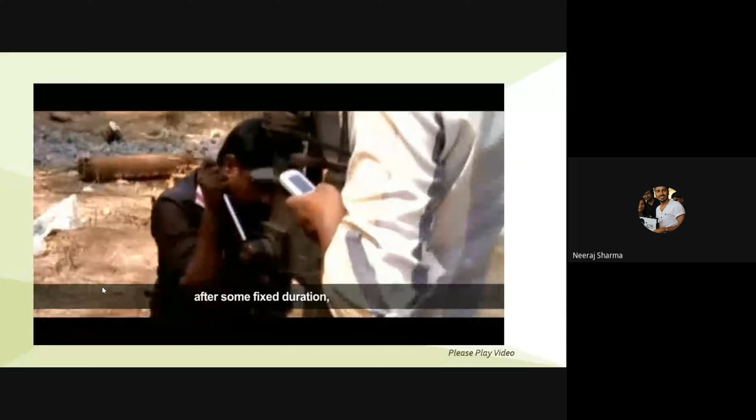So the basic agenda is pretty straightforward, and that's what it is: the free electricity that is being given to farmers is either at free rates or at very low rates. So the cost that the farmers are paying is really negligible.

So on the subsidized rate at which electricity is being given, the agenda is to further invest in the agriculture sector, either through solar pumps or energy efficient pumps, so that this subsidized electricity cost could be reduced. For example, the government has paid 8,000 crores for farmers in Punjab. So next year, by switching these pumps to solar pumps, they may have to pay somewhat around 7,500 crores. That's what the agenda is.

Reduce their overall cost through these agriculture demand side management initiatives. Now, different states have taken different initiatives under the agriculture demand side management program.

For example, Haryana has mandated the use of efficient pump sets. Now, how are they mandating it? For any new connection for pumps - if I am a farmer and I have my land somewhere nearby, let's say Ropar or Patiala, if I have to use a pump, I have to apply for an electricity connection. Whenever I apply for an electricity connection for my pump set, the utility or discom will mandate me to have minimum 4-star energy pump or minimum 3-star pump, depending on the state laws and notification.

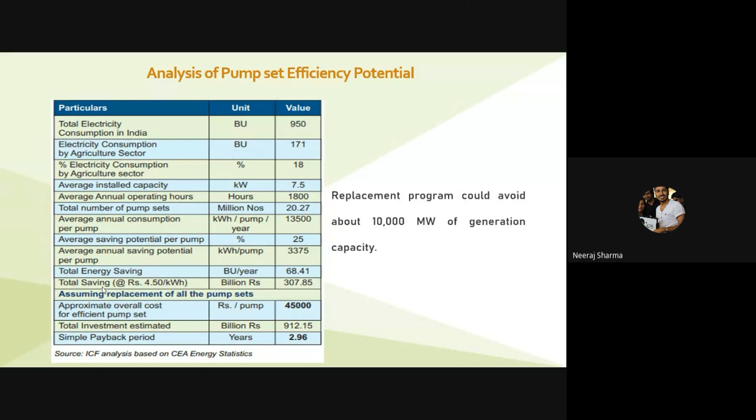We are not transitioning these pumps to solar pumps. We are just saying that by making these pumps energy efficient, the overall cost would be somewhere around 45,000 rupees per pump, and the total investment required would be 912.15 billion rupees. Within 3 years we may have a simple payback, and this may avoid somewhere around 10,000 megawatts of generation capacity.

There is one more thing which is very specific, and there are many claims for the same. Now you may say it's a democratic country and these things may happen or may not happen. Let's not talk about the political aspect of it, but let us talk about the policy aspect of the same.

Long back, when Punjab started free electricity, the average pump set that farmers were using was somewhere in the range of 5 HP, maximum 7.5 HP. This was the groundwater level at that time.

Unfortunately, there are many claims which say that due to the free electricity provided to the farmers, they are running more pumps now. They just turn the pump on and leave to their home, and when the electricity turns off, the pump goes off accordingly. They do not come back to the field to turn the pump off.

This is a specific statement by many newspapers, a direct claim, which says that when they provided free electricity, the average pump power was somewhere around 5 HP or 7.5 HP. Today, most farmers are using pumps with much higher power because they have consumed so much water that the groundwater level has been reduced. So they have to deepen their borewell, and in order to do that, they further have to increase the capacity of the pump.

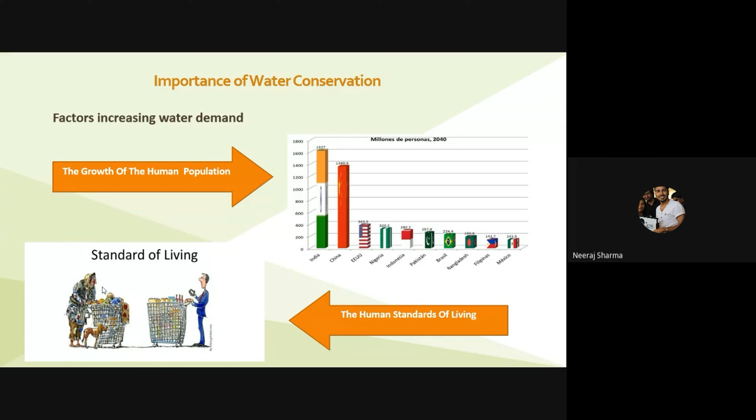But nowadays we are also using fixtures with higher flow, so that's not a good thing. So the government has come up with, in order to have water conservation, three basic options: reduce demand, reuse wastewater, and replenish groundwater.

So they have come up with the Jal Shakti mission, which has its own focus on conserving groundwater. Basically five water conservation interventions which they have gone for: intensive watershed development, renovation of traditional water bodies which they are renovating, reuse and recharging of borewell structures, water conservation and rainwater harvesting, and intensive afforestation. So these are few aspects on which the Jal Shakti mission is running.

Please do not confuse it with other running missions such as Namami Gange and the rest. They are trying to clean the water. This agenda is just to conserve the water. So there are some other running agencies and ministries as well, just to conserve the water and to clean the water. So they have different opinions as well as policies.

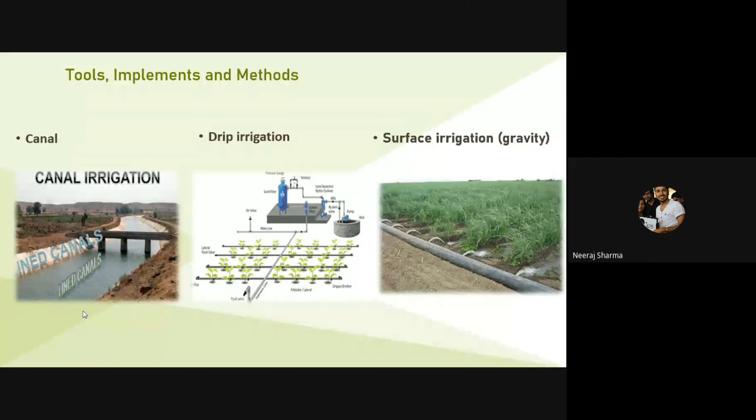The second is drip irrigation. Another is sprinkler irrigation, which we'll talk about. Then there's surface irrigation, which works through gravity, where a whole pipe runs through with holes or valves that open, so the water flows into the field through gravity.

Then there is furrow irrigation, which is conducted by creating small parallel channels along the field length in the direction of the slope. Within the slope they prepare channels, and the water spreads into the soil - a very efficient method of irrigation for crops.

Then there is center pivot irrigation, which is basically a kind of sprinkler irrigation. It has several segments of pipe joined together, supported by trusses, and it runs within a circle - it moves and rotates, just like the sprinklers you might have seen in the fields.

And finally, irrigation by lateral move. This usually doesn't happen in India, but in many countries they follow this. In India we already have land scarcity, and farmers don't want to go with these techniques, so they don't use this kind of irrigation. But this method has a series of pipes, and they run on wheels, with water sprinkled along its length. So these are a few methods of irrigation which farmers are already using.

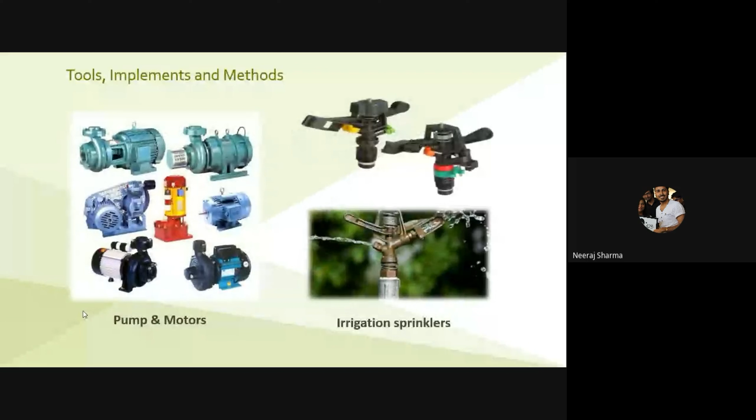Now apart from these, there are a few more tools that farmers use. One is the reservoir, and another is the dam. A reservoir is basically an artificial place where water is collected - we'll talk about it again ahead. It doesn't mean it's only for a whole community; sometimes even for a small field they prepare a reservoir. And the dam, we all know what a dam is - it's used to control the flow. Then there are pumps, motors, and irrigation sprinklers. These are the major tools to talk about. Let's see a small video, and then we'll move ahead.

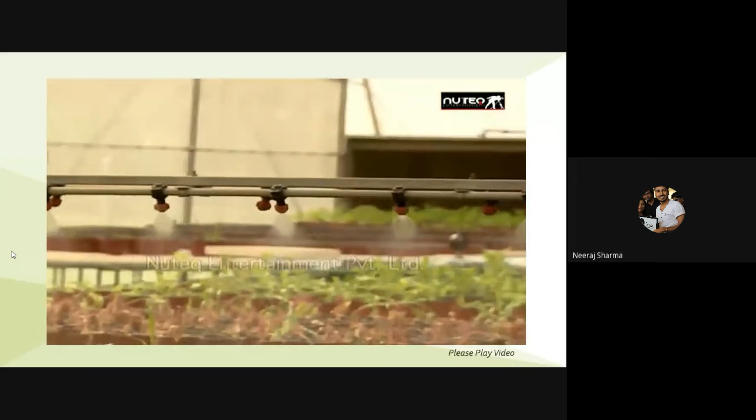किसान पारंपरिक सिंचाई विधि के बजाय उन्नत सिंचाई विधि जैसे ड्रिप सिंचाई, फव्वारा सिंचाई आदि अपनाकर पानी की काफी बचत कर सकते हैं। ड्रिपर द्वारा पानी बूंद बूंद से पौधों की जड़ों में दिया जाता है।

जहाँ पे बारिश कम होती है, जहाँ पे रेनफेड एरिया है, वहाँ हम कोशिश करते हैं कि वर्षा का पानी किसी तरह से रोक लिया जाए। टपक सिंचाई व्यवस्था हो चाहे फव्वारा सिंचाई व्यवस्था हो, उस तरह से हम सिंचाई की व्यवस्था करें। जो फ्लड सिंचाई हम करते हैं, खेत में ट्यूबवेल चला देते हैं, पानी की बर्बादी होती है, उसको भी हमें रोकना पड़ेगा।

पारंपरिक सतही सिंचाई की तुलना में जल की औसतन 40 से 50% बचत की जा सकती है, वहीं उत्पादन में 20 से 25% तक की वृद्धि की जा सकती है। ड्रिप सिंचाई का एक बड़ा अन्य लाभ यह भी है कि भूमिगत लवणीय पानी और मल जल को कृषि में उपयोग के लिए भी इस पद्धति को अपनाया जा सकता है।

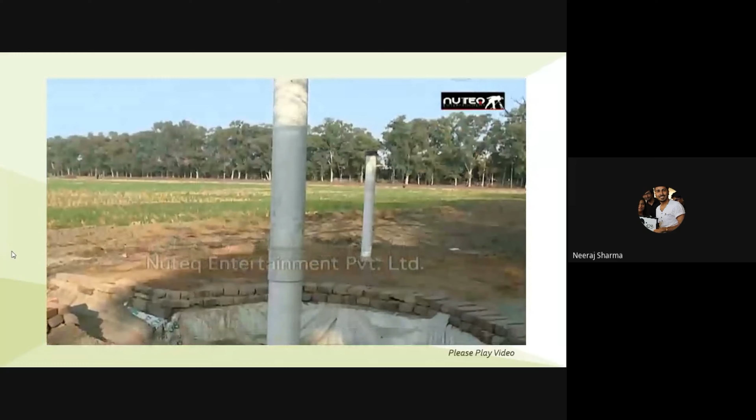कृत्रिम भूजल पुनर्भरण, 'जहां बूंद गिरे उसे वहीं समेट लो' की तर्ज पर एक नारा दिया गया कि खेत का पानी खेत में और गांव का पानी गांव में। भूजल स्तर में गिरावट को रोकने के लिए वर्षा ऋतु में पानी को बहकर नालों में जाने की अपेक्षा भूजल रिचार्ज के लिए प्रयोग करने पर अधिक बल दिया जाना चाहिए।

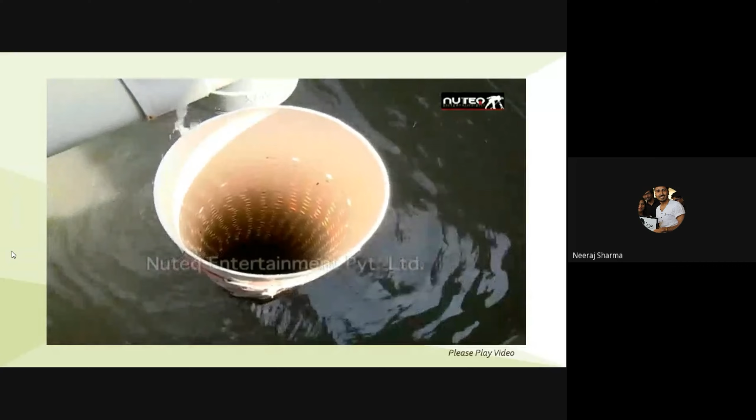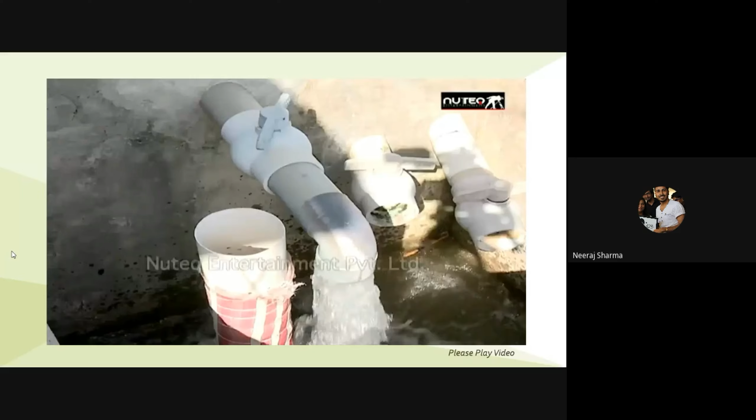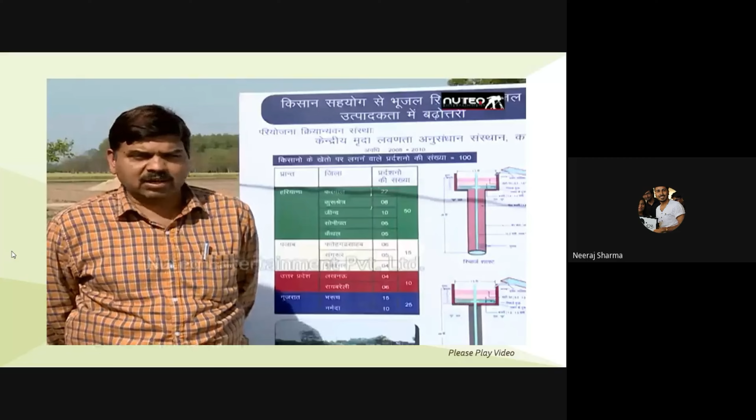जो भी ट्यूबवेल है जो कि आजकल अबैंडन्ड है, चूंकि ग्राउंड वाटर नीचे चला गया जिसकी वजह से वो आजकल काम नहीं कर रहा है, लेकिन अगर उसमें पाइप लगी हुई है तो उसके ऊपर एक फिल्टर लगाकर और जो भी बरसात का पानी एक्सेस होता है उसको उसके थ्रू उतार के नीचे उतार देंगे, जिससे एक तो फसल भी बच जाएगी और जो ग्राउंड वाटर टेबल है वो भी ऊपर आ जाएगा। पुराने तालाबों की खुदाई एवं नवीनीकरण द्वारा गांव के व्यर्थ बह जाने वाले पानी को भूमि के अंदर भेजा जा सकता है।

छत के पानी का भी भूमि में रिचार्ज एक ऐसी पद्धति है जिसे कई राज्य सरकारों ने अनुमोदित किया है। परीक्षणों द्वारा ज्ञात हुआ है कि यदि मीठे पानी की कमी हो तो उस पानी से कुछ सिंचाई करने के पश्चात शेष सिंचाई लवणीय क्षारीय जलों से करने पर अच्छी उपज ली जा सकती है।

खुले में सब्जियां खारे पानी से लगाएंगे तो वो नहीं होगी, वो मर जाएगी। लेकिन अगर पॉलीहाउस में उसे लगाते हैं और उसमें ड्रिप से सिंचाई करते हैं और जो खाद है वो भी हम ड्रिप के द्वारा देते हैं, तो इन सब्जियों की पैदावार पॉलीहाउस में बहुत अच्छे से प्राप्त कर सकते हैं।

सतही एवं भूमिगत जल निकास के पानी का उपयोग। सतही जल निकास नालियों के पानी की गुणवत्ता कृषि में प्रयोग के लिए उपयुक्त है। इसीलिए सतही नालियों के पानी को किसी भी फसल की सिंचाई के लिए प्रयोग में लाया जा सकता है।

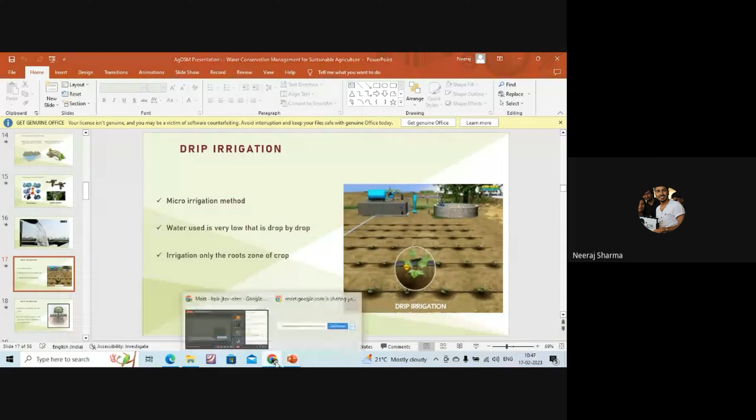So today we would also be talking about one aspect of irrigation, which is basically drip irrigation. We all know the major aspect of it, but I'll also talk about the basic tools and analysis under drip irrigation. It is a micro irrigation method, where the target is to provide water to the roots of every crop, drop by drop. So the water used is very low, applied drop by drop, and it only irrigates the root zones of the crop.

There are certain analyses by the agriculture department, and this shows why it is difficult for governments to implement these measures. Let's look at the policy aspect of that as well.

There are three major departments. One is the Department of Agriculture and Farmers Welfare, which works for the farmers, their welfare, and agriculture. Then there may be an agriculture university or agriculture department, like Punjab Agriculture University, which may be in direct contact with farmers, and similarly other states have their own agriculture universities with touch points to farmers.

Now, if I want water efficiency or water conservation in the state, which department would work for that? The Department for Water Supply and Sanitation. That's where the challenge comes in - these are two different departments, and one department, if it is making the policy, has to implement it through another department.

Similarly, if I want to implement energy efficiency, the department which makes the policy is either the central ministry, or if the Ministry of Power is not making the policy, it would be made by, let's say, HAREDA, the Department of New and Renewable Energy. HAREDA would make the policy, then ask the DISCOM to implement it, and the DISCOM would implement the policy with the help of the Department of Agriculture.

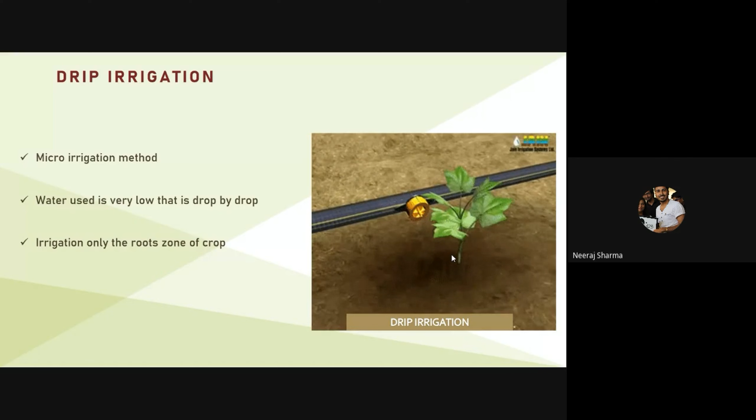Though they have the engineers, that's how during implementation it may become a challenge. That's why proper capacity building programs are being done for them, and that's why it becomes a bit difficult to implement these kind of programs. But yes, every state has done very well so far in implementing these programs.

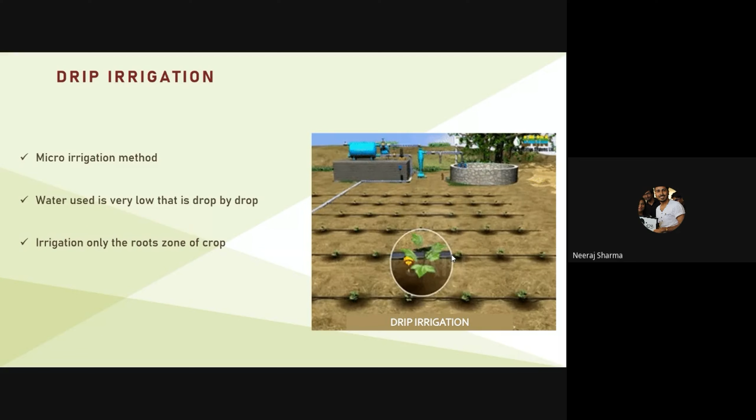Nowadays, if you visit any village or field, you may find sprinkler systems very frequently being installed. In drip irrigation, basically there is just a pipe installed within the slope of the field, and the water flows by capillarity and gravity of the soil, maintaining the soil moisture content of the crop root zone at nearly optimum level. Because the pipe has the water, and the water is spread into the roots of the crop, the soil moisture level is always maintained at an optimum level, which is a very efficient aspect of drip irrigation.

So here is how the arrangement for the drip irrigation system is being done. Many people also use a small system for this. We have shown here a Section A. At first you see there is a water course or any water nearby, and through the pump you fill that water into an overhead tank. Okay, so that's Section A.

Here is the water to the pump. The pump would take the water from here and fill the overhead tank with the water. The water source through the pump, and through the pump the overhead tank is being filled. From that overhead tank, a main pipe comes out, which is basically termed as the lateral pipe.

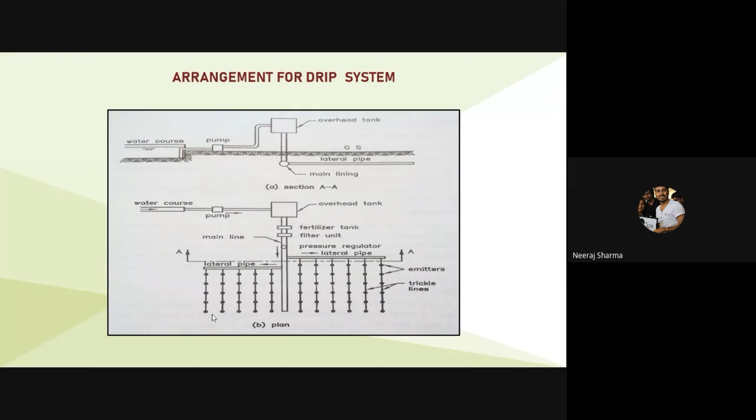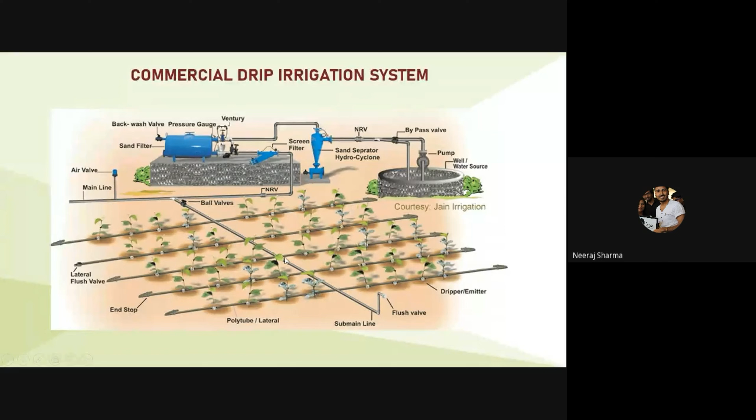Now this is how the commercial drip irrigation system looks like. You may add a few more things like a non-return valve, the main line, and an air valve, because sometimes if the pump sucks water along with air, the air valve is also there. Then a complete sand filter and everything is installed. It is a bigger system installed by an agency, with the complete piping system, the trickle lines, and the drippers or emitters. So that's a complete bigger system of the drip irrigation system.

For which crops is the drip irrigation system useful? For commercial crops, it is useful for sugarcane, cotton, groundnut, and chickpea. Similarly, for vegetable crops, it is useful for cabbage, cauliflower, okra, tomato, potato, onion, chilies, radish, brinjal, bottle gourd, French bean, capsicum, beans, baby corn, carrots, cucumber, bitter gourd, ash gourd, and gherkin. And for fruits: banana, grapes, citrus, pomegranate, papaya, pineapple, watermelon, sweet lime, and mango. For all these crops, the drip irrigation system is useful and has been successful so far.

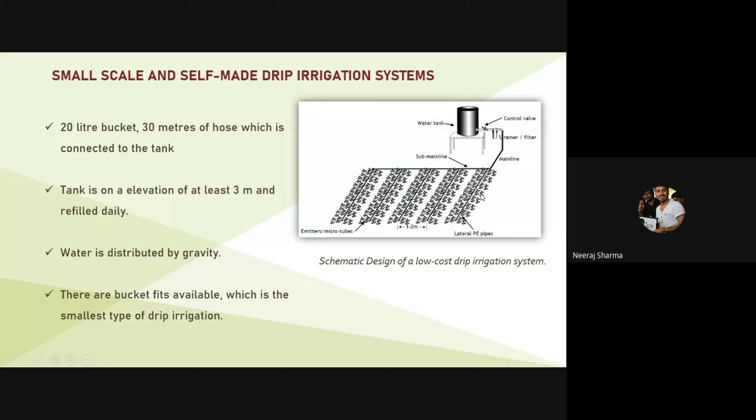Now, cost, operation, and maintenance. The industrial systems are expensive - the bigger systems are expensive at first, but small scale farmers are able to build a self-made drip irrigation system easily. Generally it would be costlier than manual irrigation, but it would definitely improve the yield, increase crop production, and reduce water use.

Regarding operation and maintenance, three things: one has to check for leaks - water leakage must be repaired immediately, and pipes should be flushed so that clogging does not occur. For example, in many places, specifically near Haryana or Punjab, also in the Mohali region, the water may have a higher level of fluoride in it. So if you're using different kinds of pipes - for example, some people use iron pipes, or PVC pipes - clogging is very common in those pipes. So pipes need to be properly flushed once a month, and leaks need to be repaired immediately.

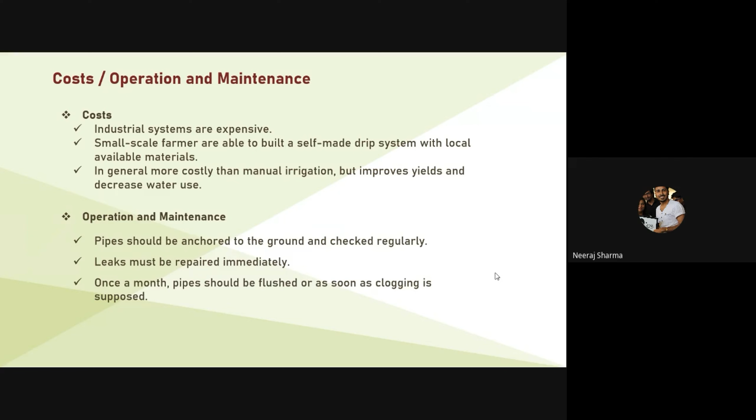So these are some of the advantages and pros and cons. High water application efficiency, it can irrigate irregular shaped fields. So if the field level is not uniform, it can still irrigate that field because the water behind it is coming through gravity. It can maintain moisture within the root zone. It would minimize soil erosion and fertilizer loss. It would uniformly distribute water with low pressure operation. So these are some of the pros.

And similarly for disadvantages, for the bigger systems, they are expensive. Commercial systems require a proper pump. It would require different types of valves as well. It would require a complete fertilizer box as well. So commercial systems may be a bit expensive. Similarly, the sun may affect the tubes used for drip irrigation. Clogging risk is also there for these systems.

For some fertilizers, sprinkler irrigation is required. Only sprinkler irrigation or more water could activate those kinds of fertilizers. So fertilizer also requires a particular amount of water. In many cases, if you are using a fertilizer which requires more water, drip irrigation may not be that successful. You require a separate sprinkler system to activate those fertilizers. So that's another disadvantage of drip irrigation.

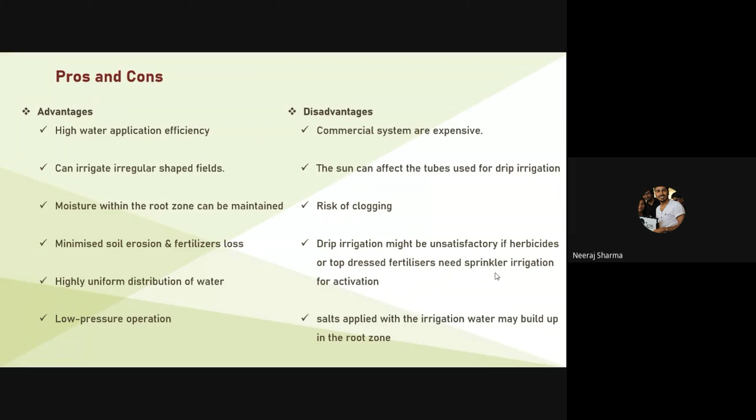Another scheme by the Indian government is Pradhan Mantri Krishi Sinchai Yojana, the target is to provide water to each and every field - har khet ko pani. And another target is to improve water use, more crop per drop. That's their agenda, to have more crop or a higher yield with less water. And they are very focused on the same.

They are basically providing assistance to the beneficiary under this scheme, under the micro irrigation scheme, which is 55% for small and marginal farmers and 45% for other farmers.

And see, for every scheme that is being implemented, it's not only the central government which pays the subsidies. Sometimes some part is being paid by the central government and the rest is paid by the state government. So similarly in this scheme also, both central and state governments pay in the ratio of 60 to 40% for all the states. 60% is paid by the central government and 40% by the state government under the scheme. So for example, if 8,000 crores of benefits is being given, 4,800 crores shall be given by the central government, and the rest, 3,200 crores, shall be given by the state government.

So major components of drip irrigation system, we have already talked about the pumping set and the filter. With the pumping set, one has to create a pressure of around 2.5 kg per square centimeter to regulate the amount of water which is being supplied.

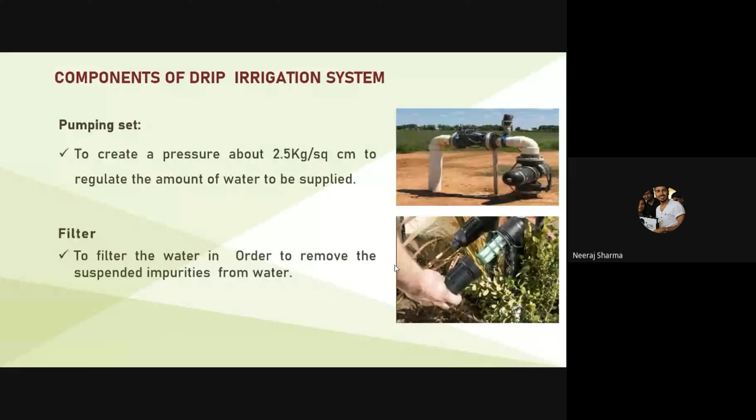And then the filter. One has to filter the water in order to remove the suspended impurities from water. Suspended impurities are basically those which may clog the pipes. That's why some suspended impurities must first be removed. So that's why a basic filter is used, so that the suspended impurities can be removed from the water, and that water could be used directly. Then these are again the components of drip irrigation system.

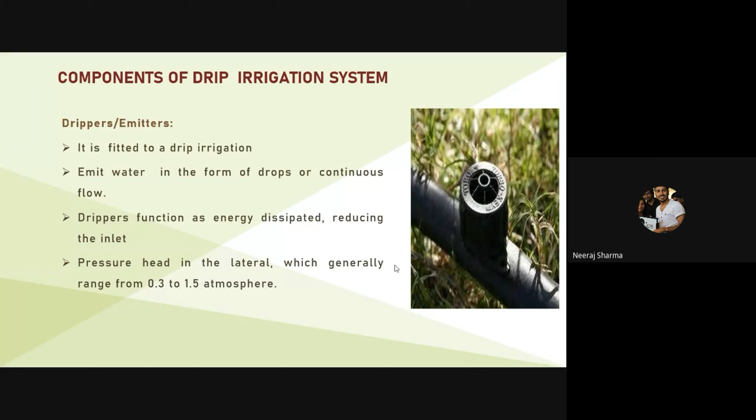Then the main line and the sub main line, we all know about it. And then the drippers and the emitters. The drippers are basically small holes fitted to a drip irrigation system, which emit water in the form of drops or continuous flow. The dripper functions as an energy dissipator, reducing the inlet pressure head in the lateral, which generally ranges from 0.3 to 1.5 atmosphere.

Now, the basic benefits to the farmer: higher consistent quality yields, huge water savings, no evaporation, no runoff, no waste. It utilizes 100% of the land. Drip irrigates uniformly in any topography and soil type. It also works on low pressure. It makes efficient use of fertilizer, no leaching, because the fertilizer is spread through these drips, through these emitters. It also has less dependency on weather, greater stability, and very lower risk.

All right. So these are some of the major pumps used in irrigation. I will talk only about the pumps, how the states are working to provide energy efficiency to these pumps. One is extracting water from the ground, supplying from nearby canals or irrigation channels. Those are one type of pumps. And then the last one are used directly in the irrigation system. On the right side, you see how the pump works, which is pretty straightforward.

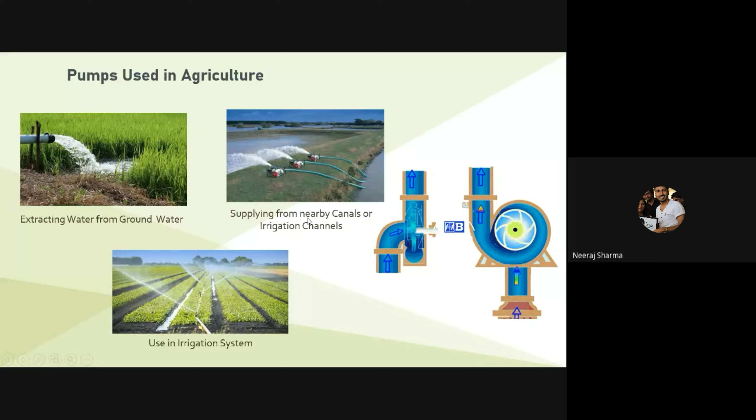This is how Punjab state government has mandated energy efficiency into the pumps. They have provided a notification which mandates, if you read point number 3, mandatory use of BEE 4-star labeled and ISI motor marked motor pump sets, power capacitors, foot / reflex valves in the agriculture sector. So this is how PSPCL, through a notification through PSERC, Punjab State Electricity Regulatory Commission, mandated the use of BEE 4-star labeled and ISI motor pump sets. Whenever any farmer comes up for a new connection, they have to ensure that they are only using minimum BEE 4-star labeled and ISI marked motor pump set. So this is how they are implementing it.

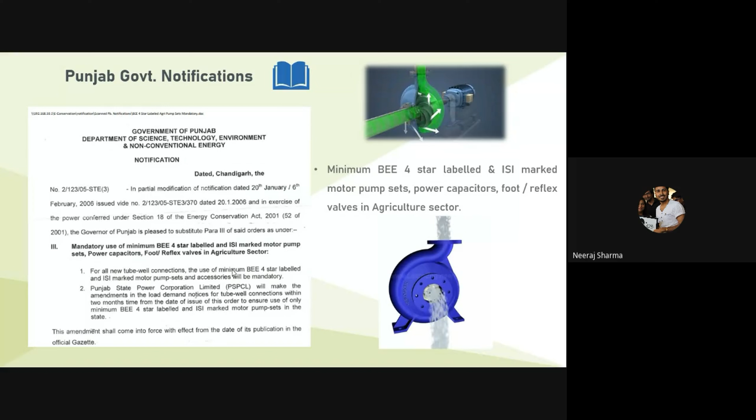So now they will provide the free electricity, but they will provide it only to a 4-star pump.

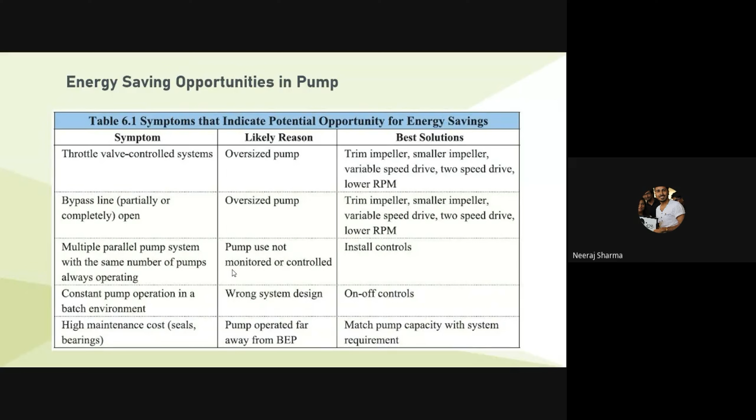Now, what are the energy savings opportunities in the pump? These are very basic things. Whenever somebody does an energy audit, you may find these kinds of issues: the pump is over designed, the pump is operated away from its BEP, and the major issue we have found is that they usually have oversized pumps. They never monitor the pumps, never control them. They just turn the system on and leave. The system is totally wrongly designed. Sometimes they have very high size pumps, and then they use normal PVC pipes to spread the water, and they find that the pipe gets damaged. So these are some of the basic issues farmers face.

So these are some success stories, pump energy efficiency case studies where implementation happened. This is by Punjab Energy Development Agency, PEDA, in the village Nathu Majra, block Rajpura, district Patiala. PEDA asked the Department of Water Supply and Sanitation to identify sites where old and inefficient pumps were installed, so those pumps could be replaced by PEDA. PEDA itself does not install these pumps; they ask another agency to do the installation, for example EESL, Energy Efficiency Services Limited, which is an ESCO company. So DWSS identified 19 sites of old inefficient pumps in Rajpura division, the proposal was approved by PEDA, and replacement of pumps was carried out. The objective was replacing old pumps with energy efficient pumps. Financial assistance of around 30 lakhs was provided, and around 4,12,681 units of energy were saved.

Similarly, there were a few more demonstration projects: in the village Amritsar, revamping of the drinking water pumping system; at Polytechnic College for Women, Majitha Road, Amritsar, one pump system was installed; similarly in SAS Nagar, Mohali, they installed 13 submersible motor pump sets; and another project in Amritsar where the drinking water pumping system was revamped. These 19 old inefficient pumps were identified by DWSS and implemented by PEDA in the year 2020.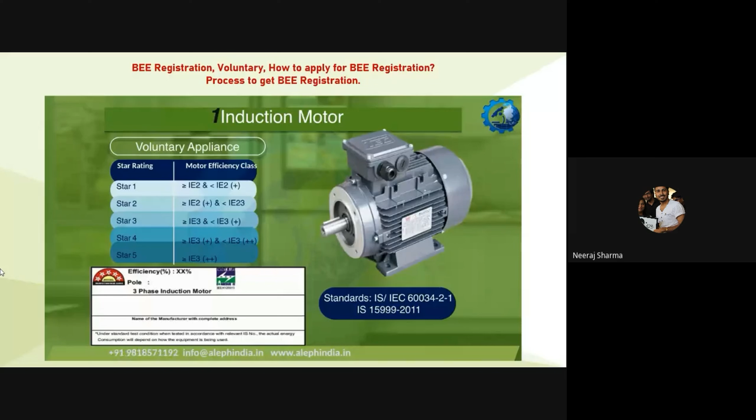For induction motors, for 5 star it should be IE3 plus plus, above IE3 plus plus basically, it would be 5 star. 4 star is IE3 plus, less than IE3 plus plus, and so on for 3 star, 2 star, and 1 star.

Similarly, for agriculture pump sets, we have talked about the performance factor. Above 1.40, it is 5 star. Again, make sure you check the star rating period, for what period the system is applicable.

So at last, we come to the energy transition, that is, how the states want to transition their energy, or switch the use of electrical energy to renewable energy. No wonder, the major renewable energy source on which the state could run is biomass, and Punjab has a huge potential for the same. Hydro energy, Punjab is also working on, but nearby states, for example Kashmir, have huge potential for hydro energy, so Himachal is also working on the same. Solar energy is there, wind energy is there, and then geothermal energy. Geothermal, different states may find use for it, but India itself does not have much working on the same.

Renewable energy is a term used to describe a group of energy technologies derived from sources that do not deplete or that can be replenished within a human's lifetime. The most common renewable energy sources are solar, which harnesses the sun for energy; wind, which utilizes the motion of wind to create electricity; hydropower, which uses moving water to generate power; biomass, which refers to technologies that use living or recently living organisms and waste to create energy; tidal, which uses the rise and fall of the tides to create electricity; and geothermal, which uses the internal heat from the earth for energy.

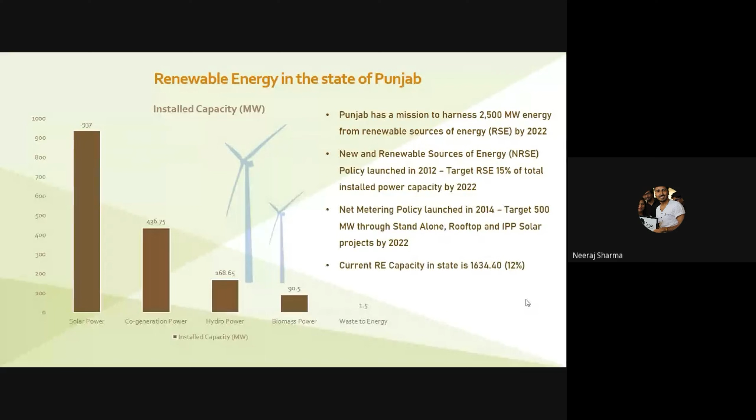The current RE capacity in the state is somewhat around 12%. So these are the new and renewable sources of energy policy 2012 initiatives.

100% electricity duty exemption on power consumed during construction of NRSE project. Panchayat land can be provided on lease for setting up of NRSE projects.

Wheeling of RE power at a uniform charge of 2% of the energy fed to the grid under intrastate open access. Open access basically means, for example, if I have a huge hotel in Delhi and don't have enough space to install a renewable energy plant, I could purchase land nearby Delhi, maybe in Rajasthan, Gurgaon, Noida, or Faridabad, and install a big solar plant there, say 1 megawatt. Then I could use that same electricity generated in Faridabad here in Delhi. That's termed intrastate open access.

In order to use that power, I have to pay wheeling, distribution, and transmission charges to the grid, to the utility company. That's why under the NRSE policy, the wheeling of RE power is charged at only 2% of the energy fed to the grid.

So that's one thing. Then there's 100% exemption on pollution and environmental clearance for solar projects—it's totally exempted. And 100% stamp duty exemption, both on land purchase and lease, and change of land use charges has also been exempted.

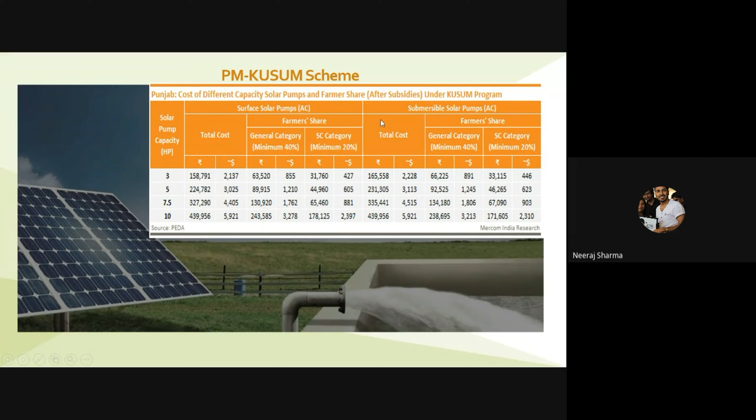So if the farmer's share is 40%, and if the farmer is from the SC category, the share is only 20%, and the rest 80% the government pays. In the general category, 60% the government would pay. This is the PM Kusum scheme, under which PEDA has done wonderful work, and similarly HAREDA, in the state of Haryana, has also implemented or installed a lot of pumps.

So it basically has three components: Component A, solar power plants of 500 kilowatt to 2 megawatt capacity being installed. Under Component B, standalone off-grid solar pumps of up to 7.5 HP capacity, and under Component C, grid-connected agriculture pumps of 7.5 HP are being installed. So that's under the PM Kusum scheme.

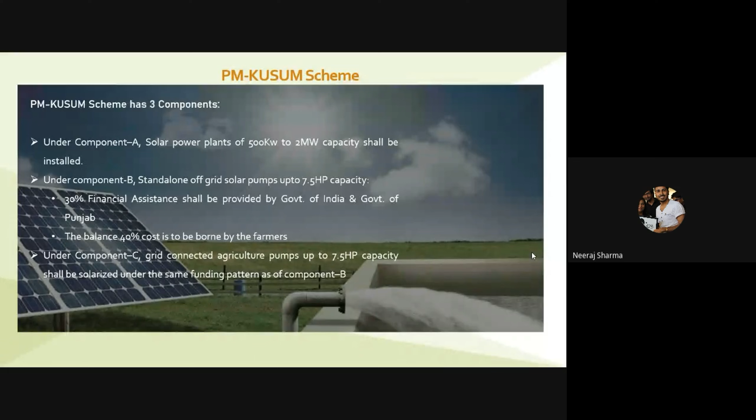Every state is running directly on the scheme. The only challenge the farmers are facing with this scheme is once the pump is installed - let's say the state has installed a 5 HP pump, and I am a farmer who has applied for the same scheme and been selected, and then a pump of, let's say, 7.5 HP is installed at my field.

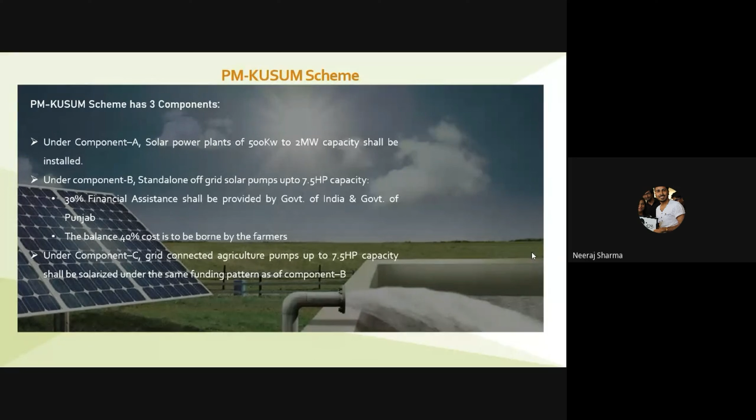Later on, if the water level drops down, the deepening of the borewell has to be done by the farmer at his own cost. And when the farmer pays his own cost, he would definitely go for a normal pump instead of a solar pump. So that's the challenge farmers are facing - once the water level drops, the deepening of the borewell has to be done by the farmer at his own cost.

So this is a small last video on PM Kusum, and then we'll close the session for today.